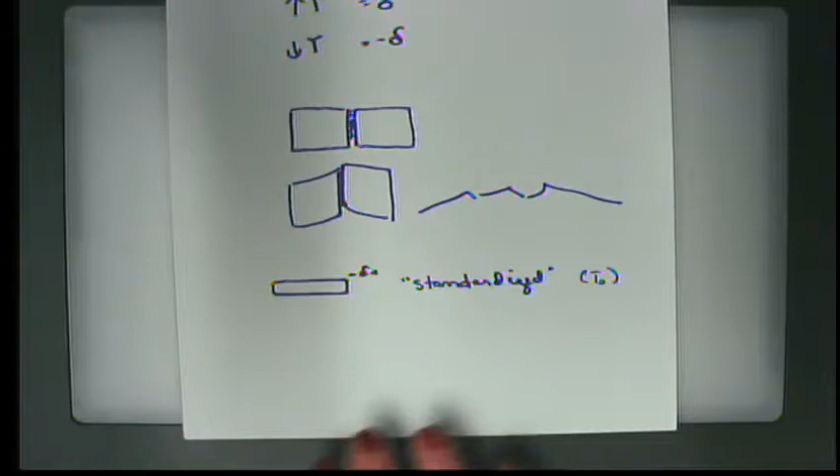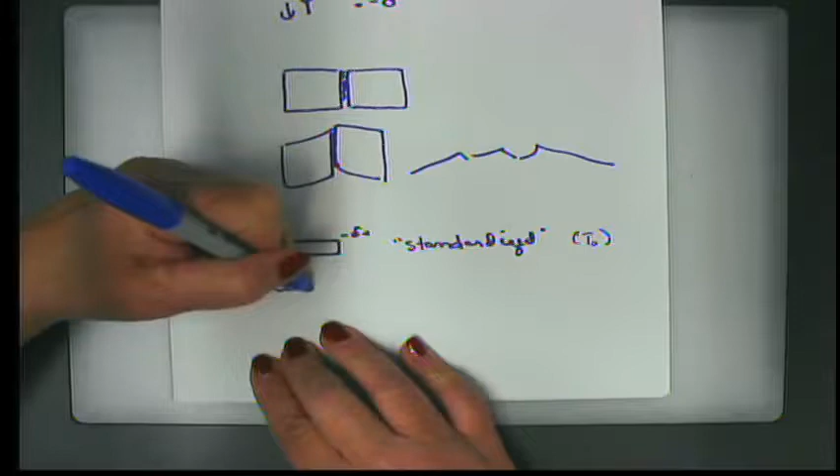So how does temperature expansion work? Well, it amounts to this idea: alpha, which is a Greek letter, stands for a quantity called the coefficient of thermal expansion, which is specific to every type of material. Some materials expand quite a bit due to temperature change, some less.

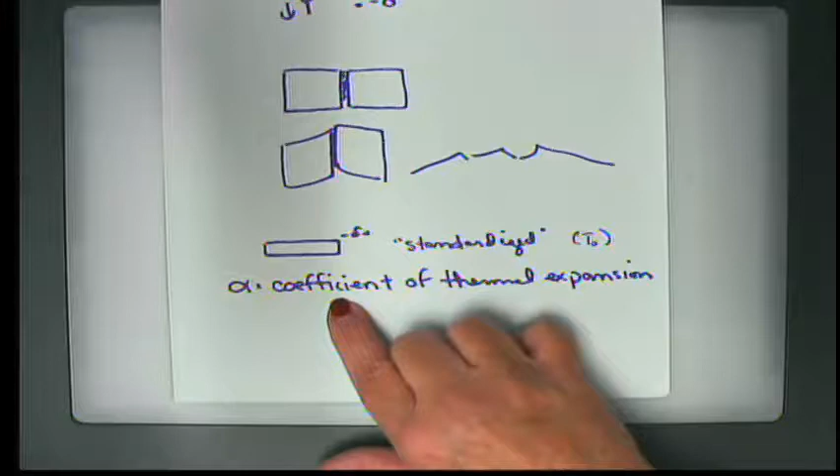Yeah? What is that? After your rectangle, you drew a del, right. The del, and then after that, what is that? This is just a little size symbol, just saying that it expands some amount. And of course, that's greatly exaggerated. On problem 2-41, for example, when I worked it out, the value of del is actually measured in micrometers, which is 10 to the negative 6. So it's some number of thousandths of millimeters, 46 micrometers.

So in other words, expansion and contraction tend to be extremely small numbers because most materials do not expand or contract a great deal based on how much they're pulled. Now some do. For example, silly putty: if you pull on it, it's really easy to pull on. It expands quite a bit. It also doesn't hold stress very well, right? So you don't want to build your house out of silly putty.

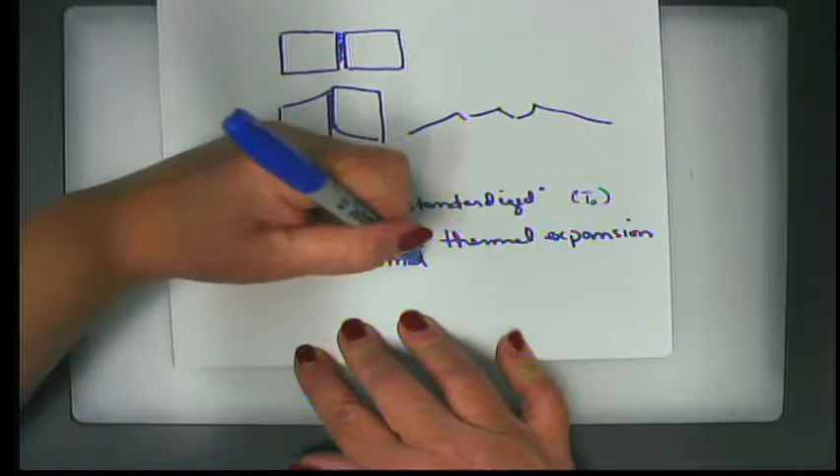Bad idea. So anyway, the coefficient of thermal expansion is specific to each material, which means it's probably tabulated somewhere, and it is in fact tabulated in the back of your book in the appendices, similar to the values of modulus of elasticity that I showed you last time.

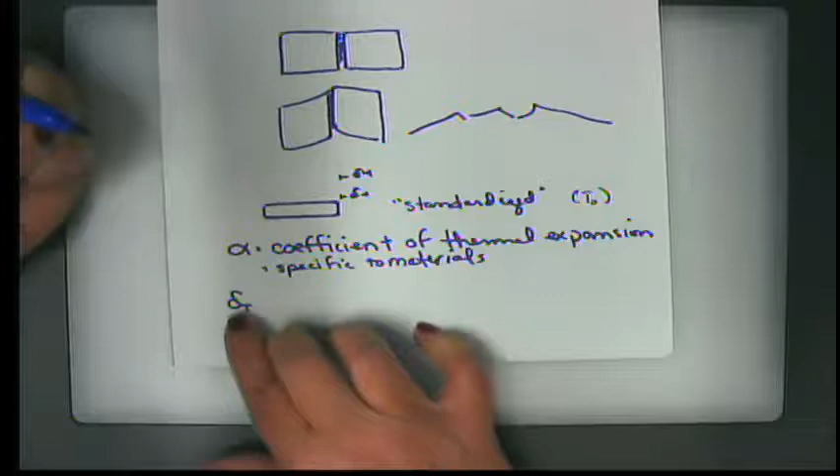So the equation basically looks like this: del sub T, the change in length due to temperature, is equal to alpha, the coefficient of thermal expansion, times delta T, the change in temperature, either between two temperatures or between a temperature and a standardizing temperature, times the original length L. Now, if you run the numbers on this, del is going to be in dimensions of length, as is L. Delta T is going to be in units of temperature change, degrees, either centigrade or Fahrenheit. And so alpha is going to have the dimensions of per degree.

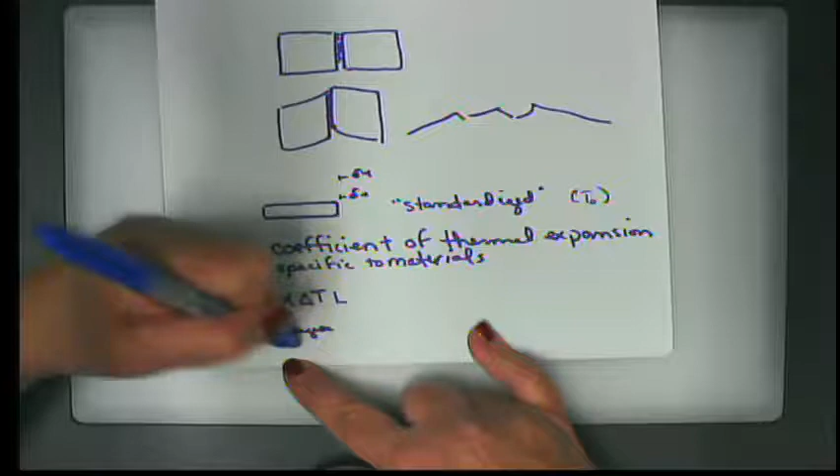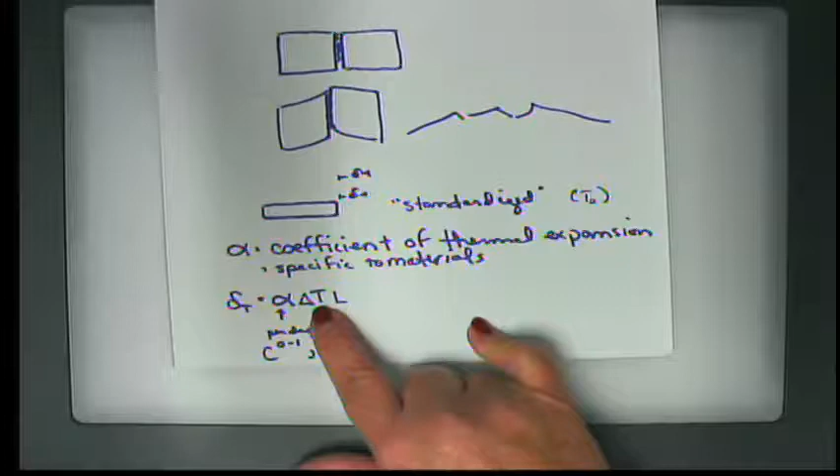So in other words, a degree to the -1. Either degrees centigrade to the -1 or degrees Fahrenheit to the -1. Now, since we're talking about a delta, it doesn't matter if you're talking about absolute or ordinals. So you can talk about degrees centigrade, degrees Kelvin, degrees Fahrenheit, degrees Rankine, because the delta is the same. If you're subtracting Fahrenheit from Fahrenheit, it's the same as subtracting Rankine from Rankine because you're subtracting off the base.

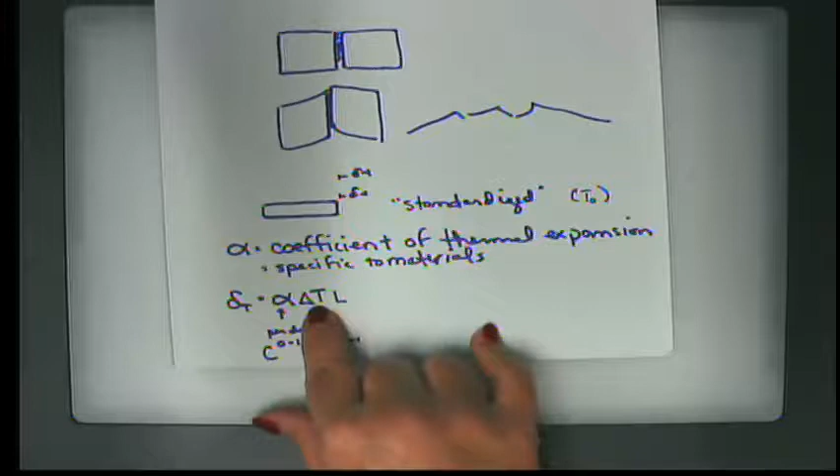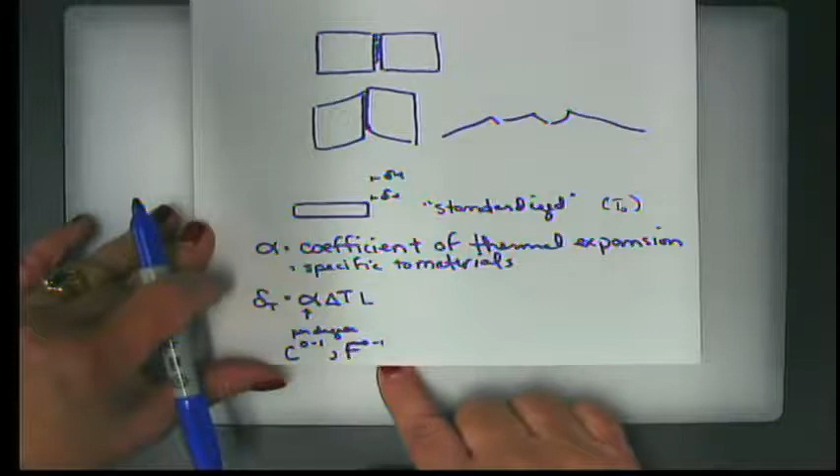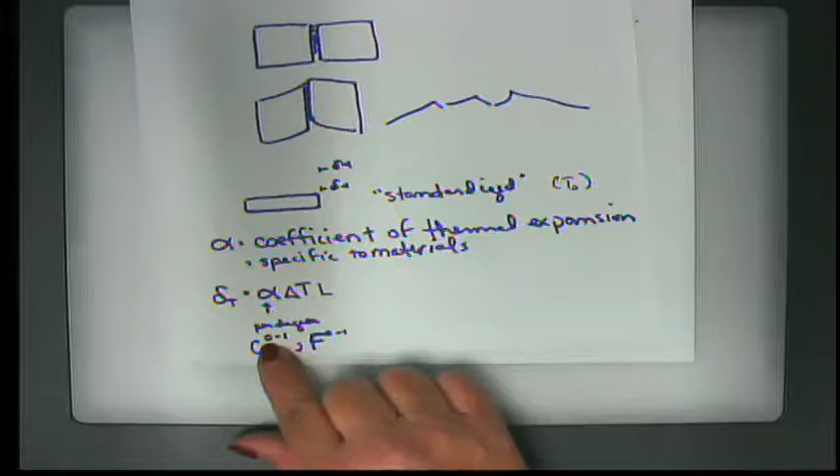Anytime you use a temperature, not a delta, not a change in temperature, but a temperature, you need to make sure that you're using either absolute or non-absolute, something with a non-meaningful zero in the equation, depending on how the equation is written. Yes? What degree is that? Sorry? It says something degree. Here? Yeah. Centigrade? Per degree. Per degree. Yep, per degree.

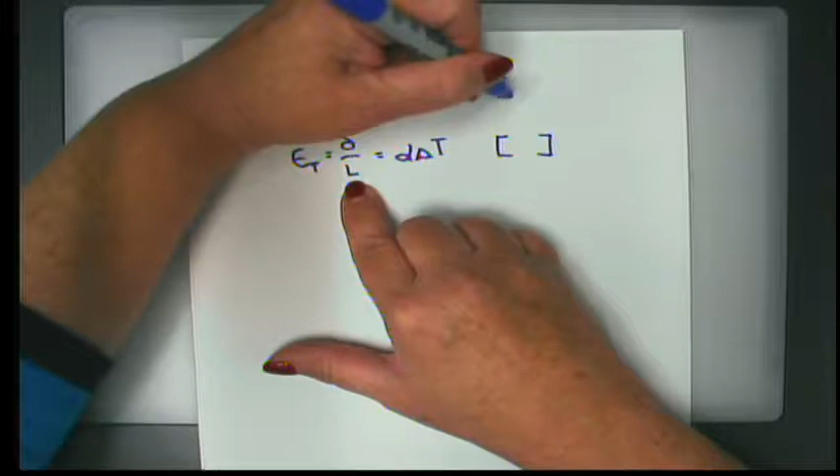Okay. So what this means to us is, first of all, since we know that del due to T is equal to alpha delta T L, we also know that epsilon, which is equal to del over L in general, is going to just equal alpha delta T, and that will be dimensionless. This will be in dimensions of length. This will be dimensionless. Now, the other thing is, for del due to temperature, del is not a function of stress. If it is not restrained in any way, the expansion or contraction will occur without having any stress.

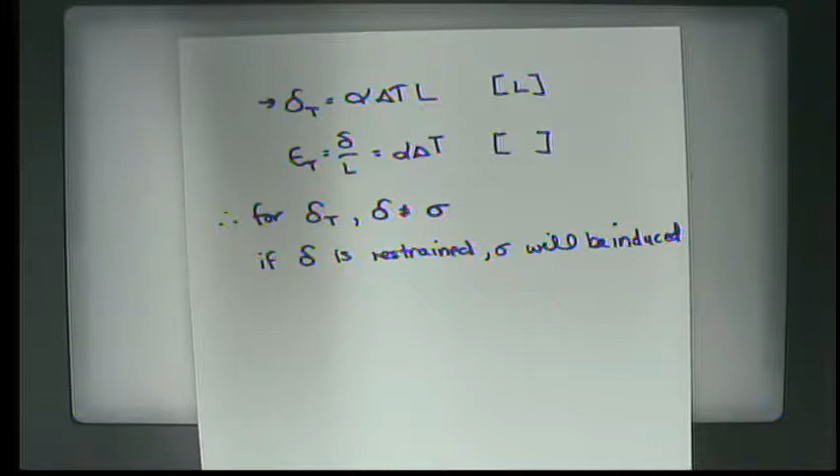However, if the expansion or contraction is restrained, stress will be induced. And that's what happens when we see the sidewalk crack. If you just had a block of concrete sitting out in the middle of nothing, as it expands or contracts, it wouldn't buckle. There's no strain or stress being put on it. The strain or the del is occurring without a stress. However, when you restrain it, it then results in having a stress associated with a restrained expansion.

All right, so I want to take a look at a couple of problems, and I'm going to ask you a couple of questions. I want to find a good problem with a good delta T in it. Let me look at aluminum, 57. Let's look at 58, 2.58, where we can apply these ideas.

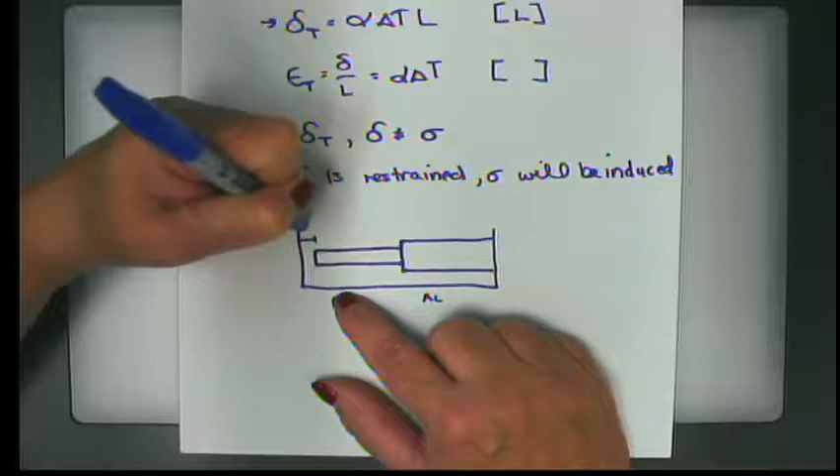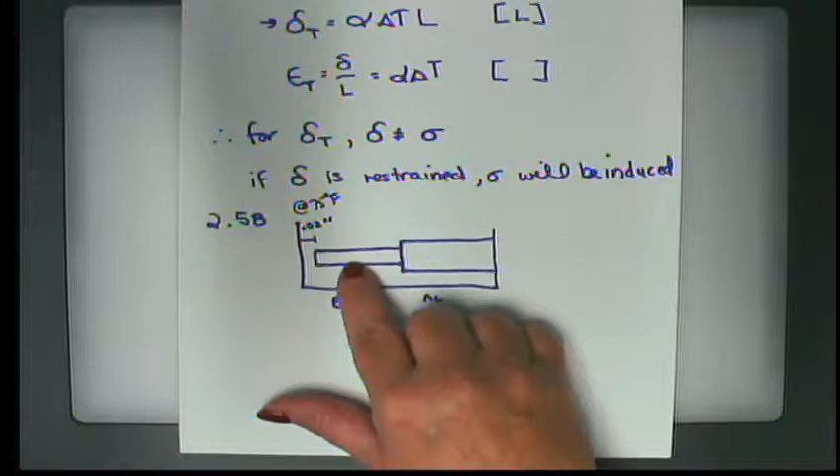2.58, we have a composite rod that is welded to a wall on the right. We have a larger portion made of aluminum and a smaller portion made of brass. And we have a 0.02 inch gap between the end of the brass and the wall. Now, it tells us that this gap exists at a temperature of 75 degrees Fahrenheit. So that's really our standardizing temperature. We've measured this gap when the temperature is 75 degrees Fahrenheit.

But it says then, determine the temperature at which the normal stress in the aluminum bar is equal to 11 KSI, at T equals question mark, and then the corresponding length, so in other words, L plus del of the aluminum bar. So what are we really talking about here? If we increase the temperature to a certain point, that 0.02 inch gap is going to be filled, isn't it?

So the brass and aluminum together will get longer and they will touch the wall at some point. What happens after the brass portion of the rod touches the wall? At that point, the wall is going to start pushing back. So there are really two parts to the problem. There's one part where we fill that 0.02 inch gap at which there is no stress. But then as the temperature continues to rise, we're going to have a stress from the wall pushing back.

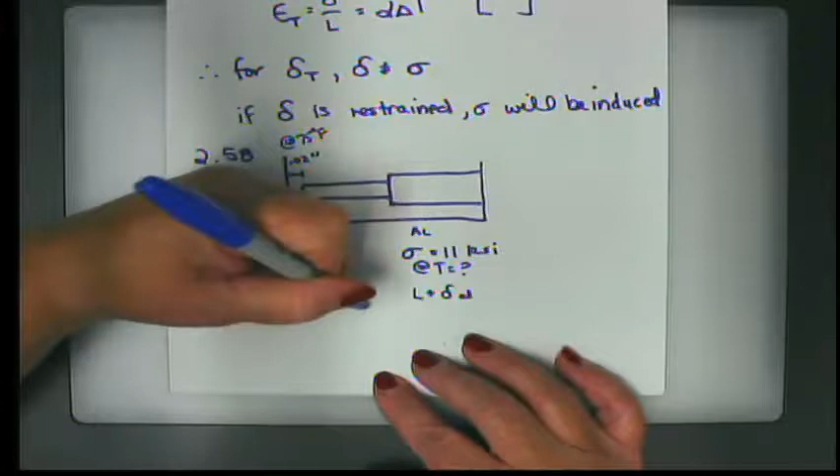Okay, so let's work it out. You can do this in one step, but I would prefer to do this in two steps. The first step is, at what temperature will the gap close? So when it just touches the wall.

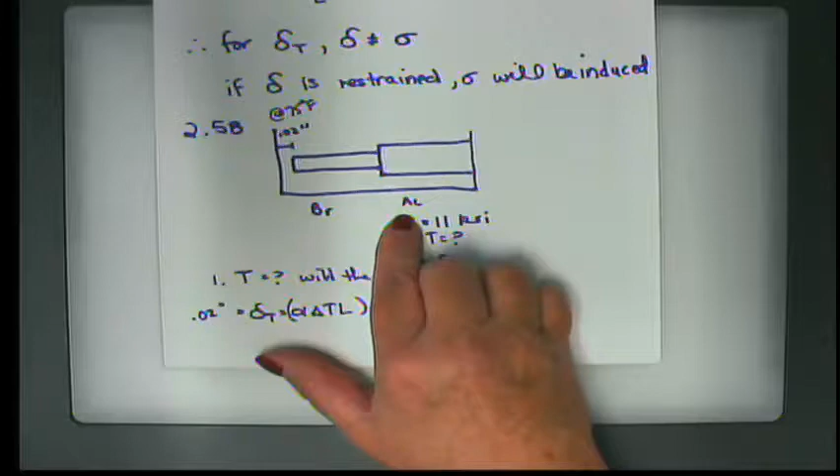Well, the answer is that del due to temp is equal to alpha delta T times L, but we have two parts. We have alpha delta T L in the brass and the aluminum. And the del T that we're interested in here is 0.02 inches. So we are given some information about the bronze rod and about the aluminum rod. We're given the cross-sectional area, so we don't have to compute that. The area here is 2.4 square inches.

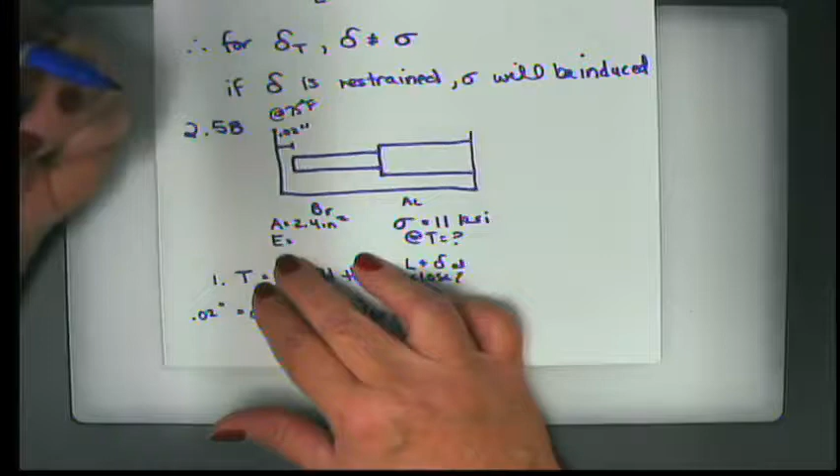And the modulus of elasticity, E of the brass, is 15 times 10 to the 6th psi. And the coefficient of thermal expansion is 12 times 10 to the minus 6 per degree Fahrenheit. You notice that's a very, very small number. Coefficients of thermal expansion tend to be very, very small numbers.

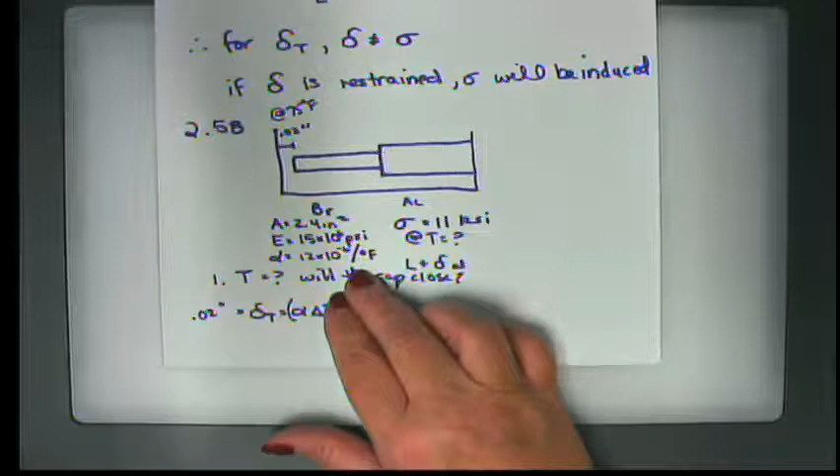For the aluminum, we're told that the cross-sectional area is 2.8 square inches, that the modulus of elasticity is 10.6 times 10 to the 6th psi, and that the coefficient of thermal expansion is 12.9 times 10 to the negative 6 per degree Fahrenheit. All right, so this is a lot of data, but for the, yes?

I was just wondering, maybe it's just all metals are the same, but when you have a material that keeps expanding as energy's being added to it, does it actually go consistently before it hits its melting temperature? No. That's an excellent question. When you start to have phase changes or molecular structural changes, everything changes. So this is really when you're just in the thick of that solid state. And some metals have more than one solid state, so it's all over the place.

Yeah, so we've really defined this problem very narrowly. We're not melting the brass, or the bronze, or the aluminum. I was just wondering, would it continuously expand before it just started to drip? No. Things change. They're very, very different. An example of that which exhibits a strange change is water right around the freezing temperature. Because as you know, frozen water, which is solid water, floats on top of liquid water, which is quite unusual.

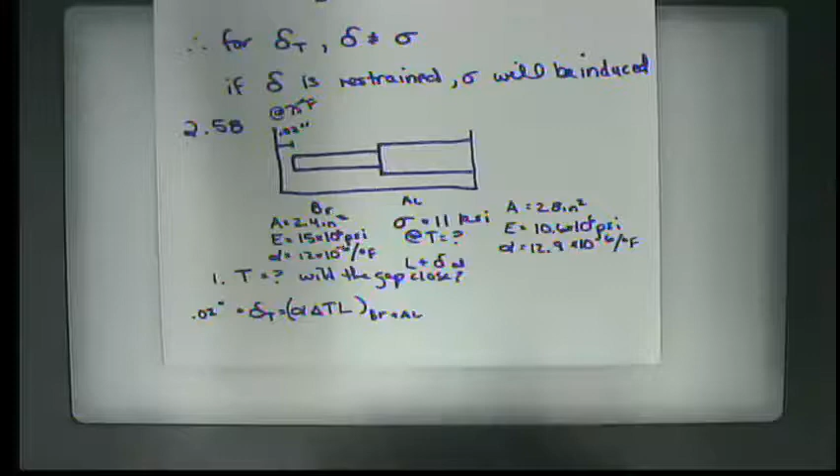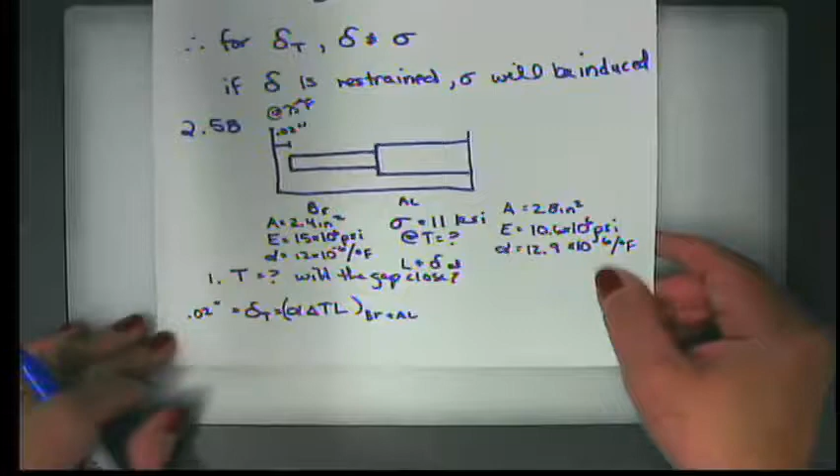It's a different property. But if you look at the expansion and contraction due to temperature changes right around zero, it changes in a very strange way. So this is really assuming that we are in a range where this linearity occurs, and we haven't really discussed what would boost us out of that linear range. But it's a good question. So we're not going to melt the brass or the aluminum. We're not going to bend it. It's just going to take the stress that we're going to give it. Okay? So in the first part, there's no stress at all, right?

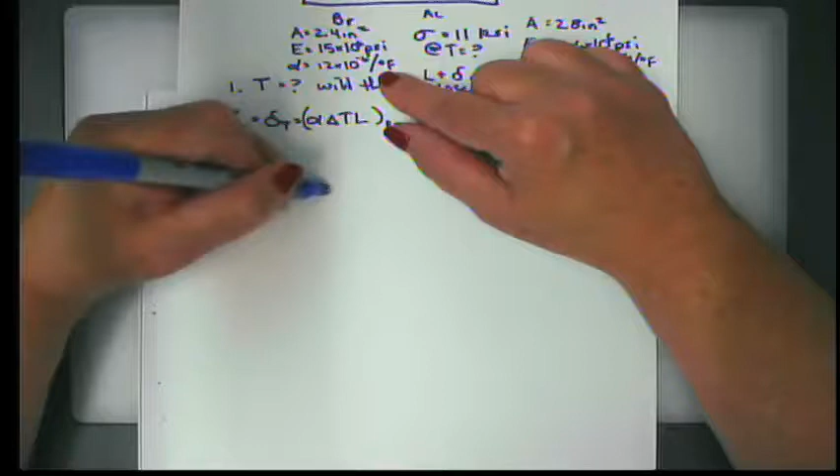When we're expanding up until the time that it touches, in other words, when the delta is 0.02 inches, we have zero stress. But 0.02 then is equal to alpha, 12 times 10 to the minus 6 per degree Fahrenheit, times delta T, which is our new, higher temperature, the temperature where it touches, minus 75 degrees Fahrenheit. So these units cancel out, times the length of the brass, which the problem tells us is 14 inches.

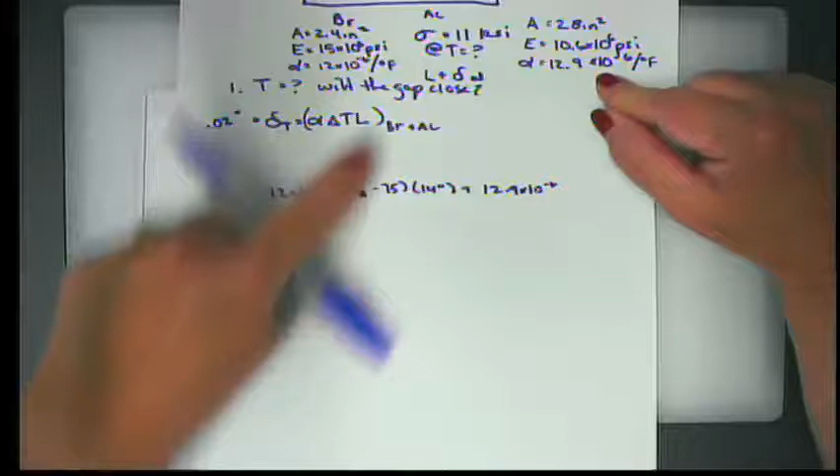And we add to that the alpha, which is 12.9 times 10 to the minus 6. Now the high temperature is going to be the same. That's actually the variable that I'm going to be solving for. Minus 75, times the length of the aluminum rod, which is 18 inches.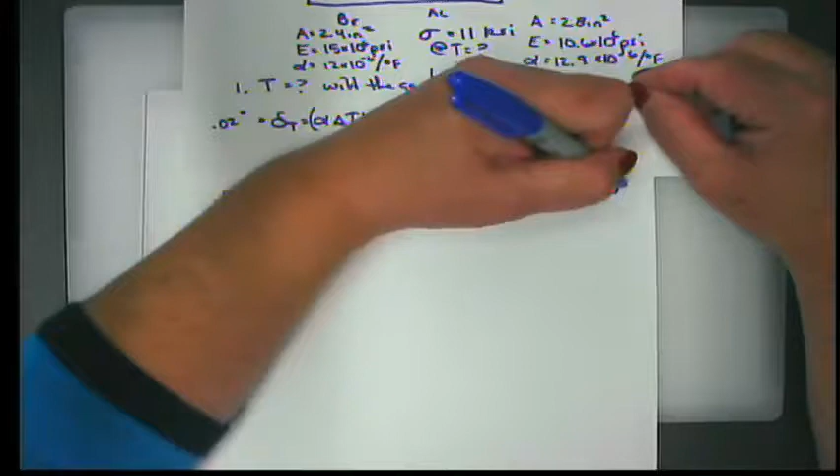Okay, so in this first part of the expansion, if I'm going to be solving for T sub h, we get 0.02 equals, I'm going to multiply 14 times 12 times 10 to the negative 6, which is 168 times 10 to the minus 6 times T sub h minus 75, plus, then I'm going to take 12.9, multiply it by its length, which is 18, 232.2 times 10 to the minus 6, also times T sub h minus 75.

Okay, so now I'm going to distribute this through. 0.02 then is equal to 168 times 10 to the minus 6 times T sub h, minus 168 times 10 to the minus 6 times 75, which is 12,600 times 10 to the negative 6.

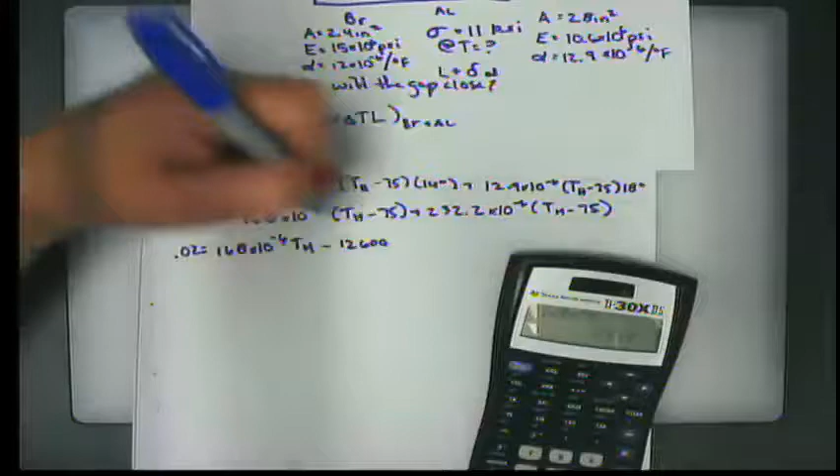And I'll distribute this through: 232.2 times 10 to the negative 6 T sub h, minus 75 times that number, which is 17,415 times 10 to the minus 6. All right, now to do my arithmetic, I need to pull the two constants together, 12,600, which is negative, and 17,415, which is negative, so I add the absolute values.

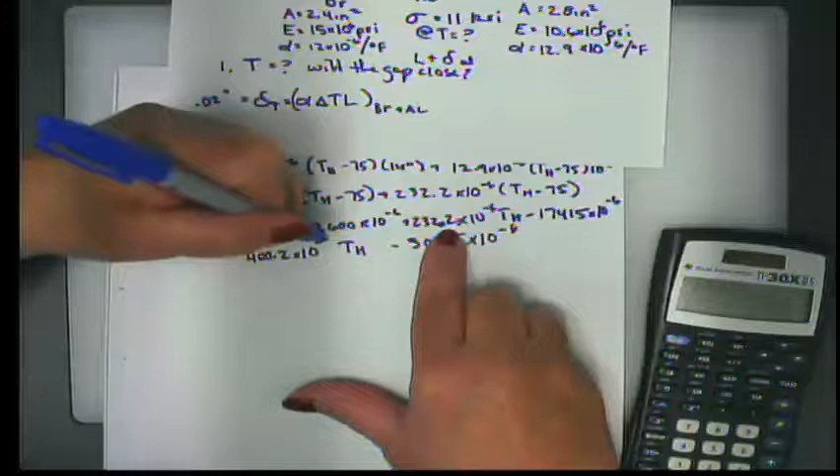And that value is negative 30015 times 10 to the negative 6. Then I add these two values, and that's my coefficient of T sub h. So I have 168 plus 232.2 times 10 to the minus 6. So this plus this is 400.2 times 10 to the negative 6 T sub h equals 0.02.

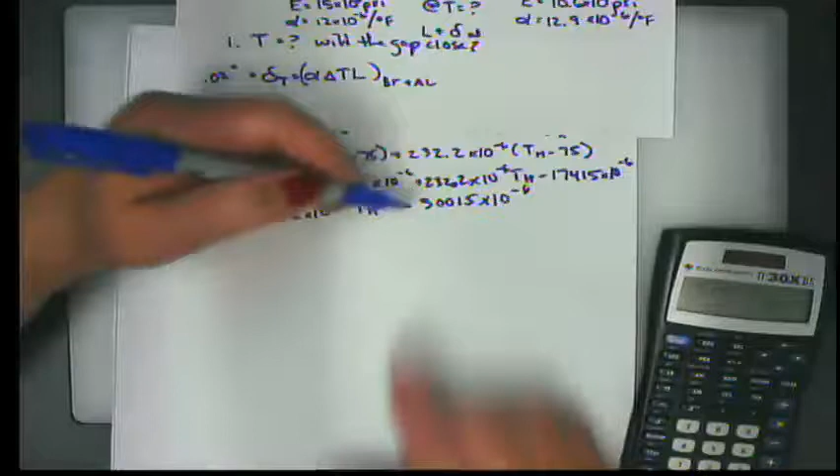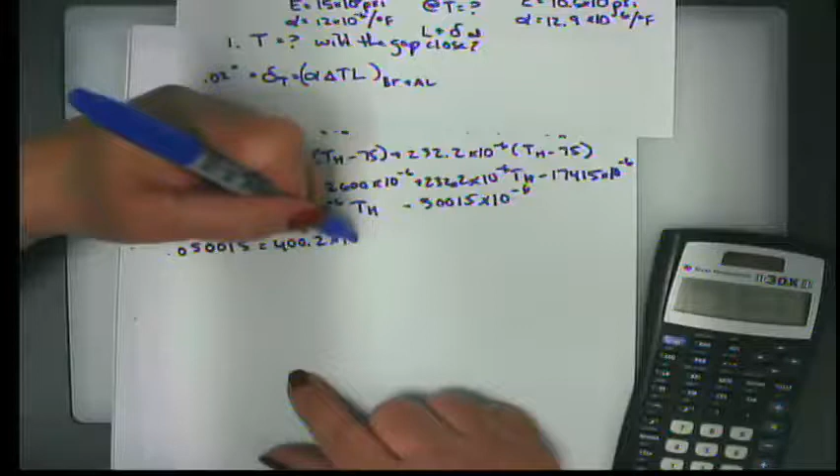Okay. So then I divide by the coefficient on T sub h. T sub h is equal to this number divided by this number. And that would be 10 to the minus 6 in the bottom, so 10 to the positive 6 in the numerator, so I multiply by a million. I get T sub h is 124.97 based on my work. That's in degrees Fahrenheit. So I'm going to call that 125 degrees Fahrenheit equals T sub h.

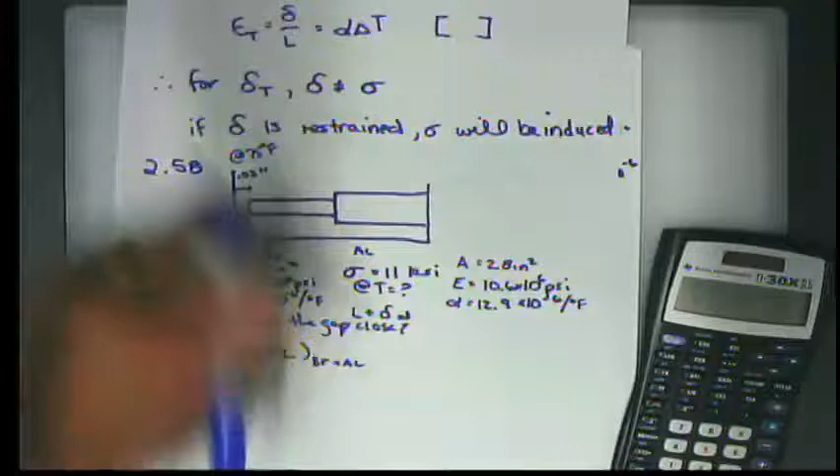Okay, so what that tells me is when the temperature rises from 75 degrees Fahrenheit to 125 degrees Fahrenheit, this gap is going to be closed. Okay? And there's no stress at this point. But as the temperature increases to some new T sub h, stress is going to occur.

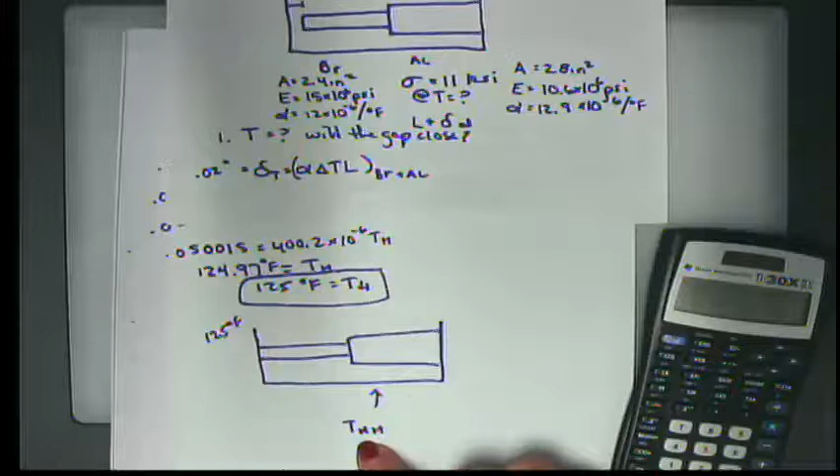So now we have this situation. The temperature is 125 degrees Fahrenheit. And now I'm asking, what is the temperature? I'm going to call it T sub HH for the second high, or high squared, right? Because I got it one. This is sort of like my intermediate high temperature. I want to know what the temperature is going to be when sigma is 11 KSI, which is 11 times 10 to the third PSI.

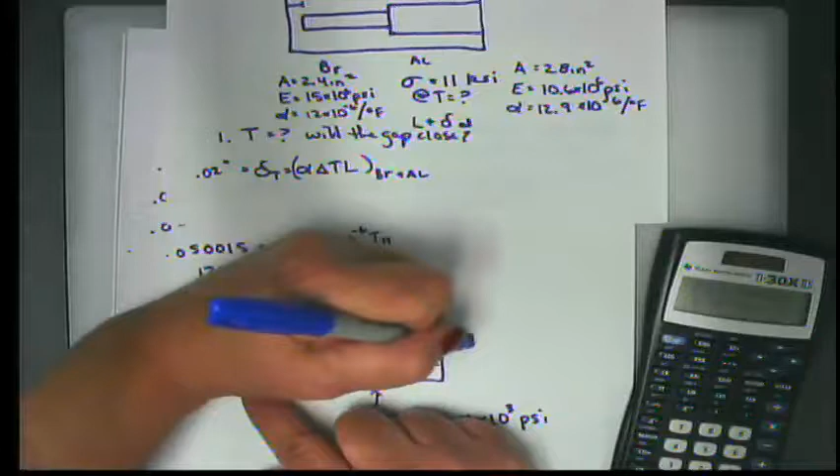All right. Well, what's going to happen? Once it touches and it continues to expand, we're going to have a force pushing back, a reaction at this wall, which is going to be equal to the reaction at this wall. Right? And it puts the whole thing into compression. So how does that occur? Well, the first thing we can say is that the new del, the del after it touches, is going to equal 0. And there are 4 things that are going to be happening.

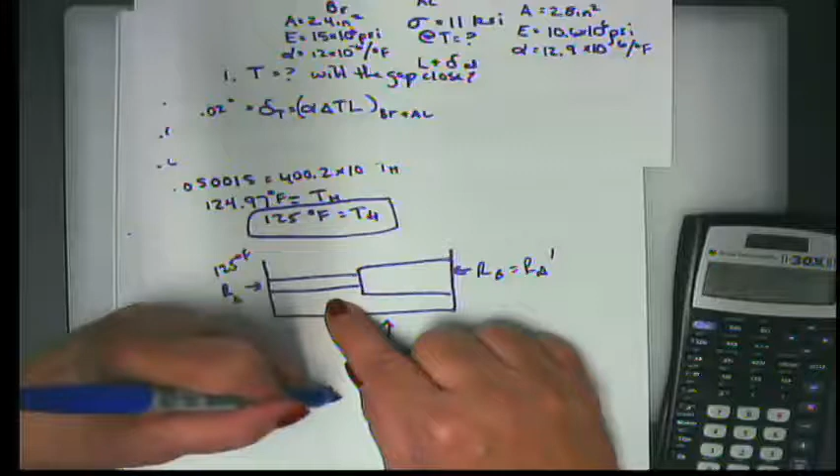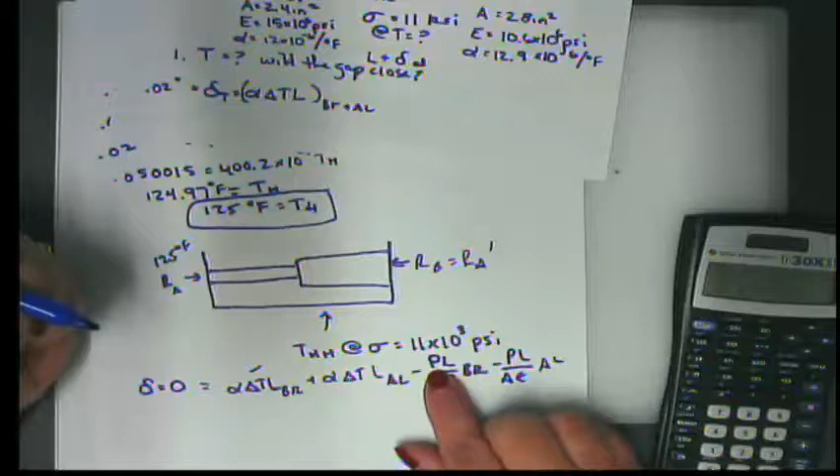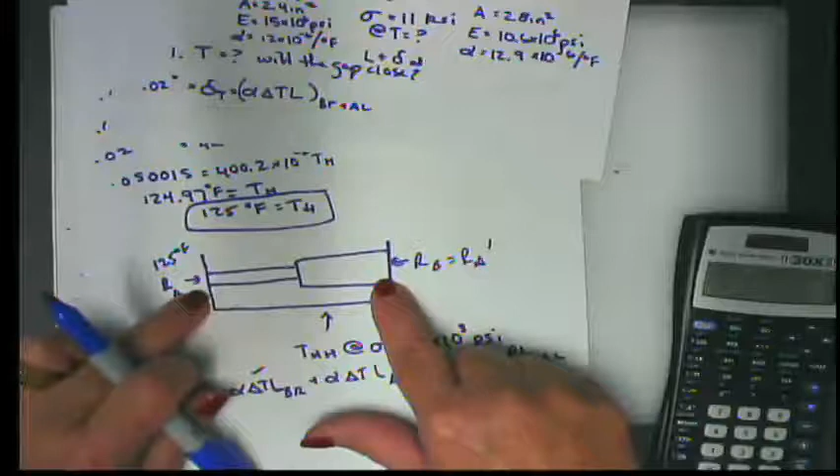We're going to have an alpha delta TL that is expanding the brass rod, and we're going to have an alpha delta TL that's expanding the aluminum rod, and then we're going to be pushing back, so it's negative PL over AE of the brass rod minus the PL over AE of the aluminum rod. Okay? And those things added together equal 0. I do not know what this is. I don't necessarily know what this is, except to say that it's equal to the same as this, right? The force in those two things is going to be the same. Okay?

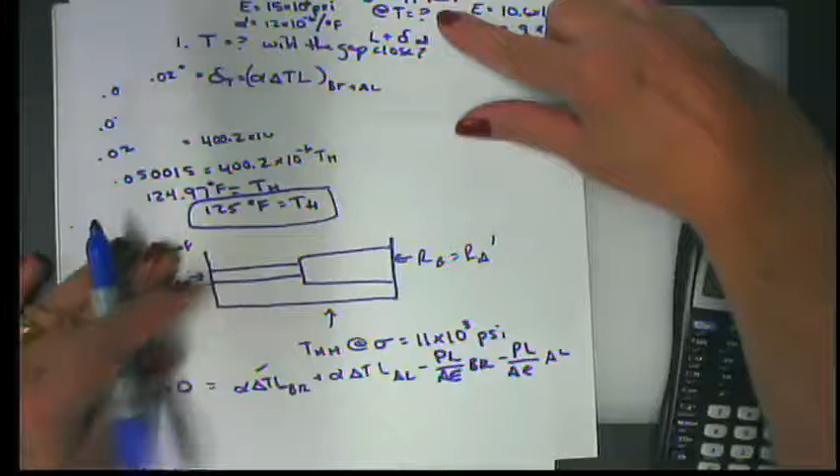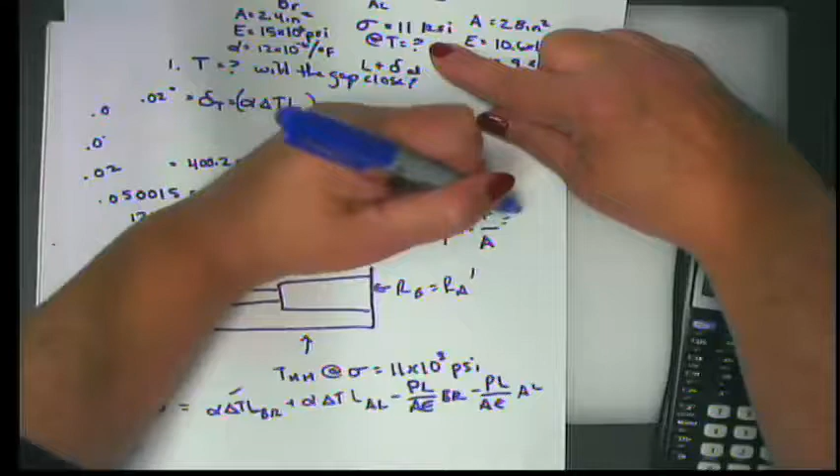And I also know I can find that because I'm told that if sigma in the rod, in the aluminum, is 11 times 10 to the third psi, we also know that that's going to equal the force divided by the cross-sectional area. So we can use that to solve for P, because I know what A is. Right? So I'm going to do that to solve for P, and then I can put that back into this equation to solve for T. All right?

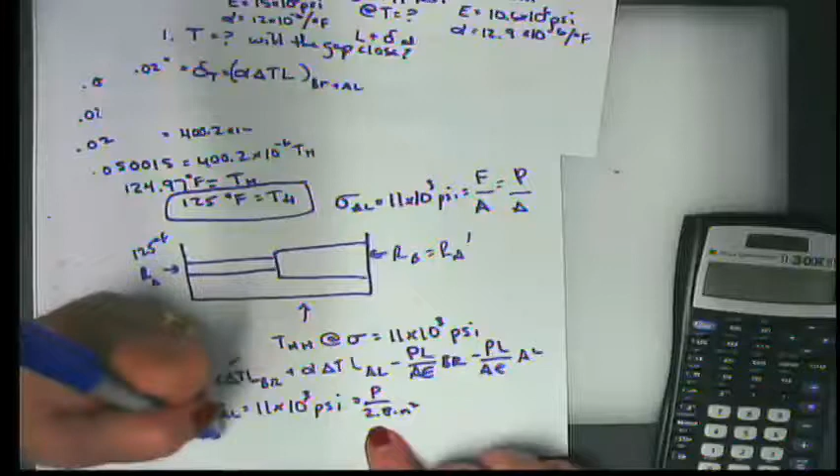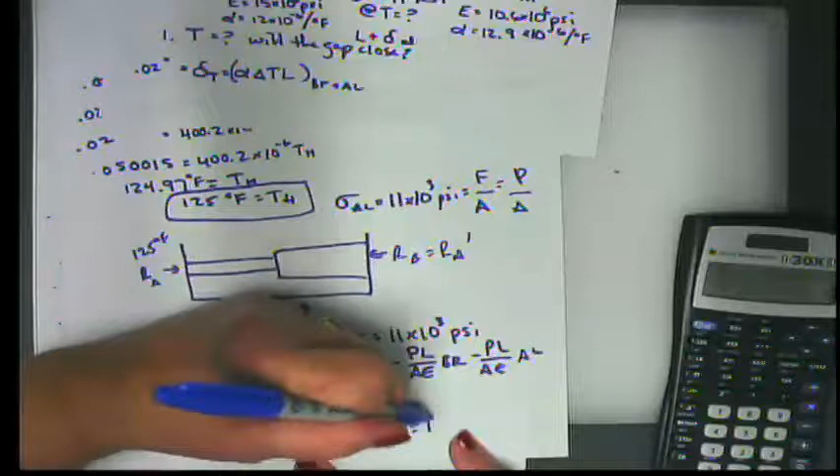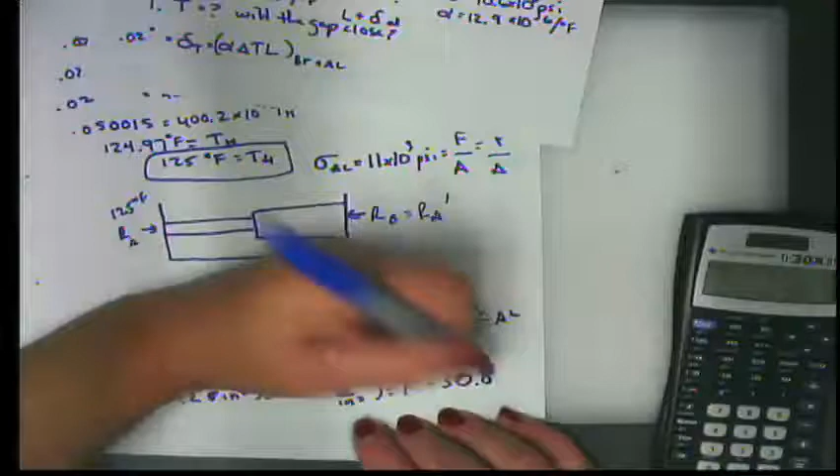So since sigma in the aluminum is equal to 11 times 10 to the third psi, which is equal to this unknown force P over the cross-sectional area of the aluminum, which we're told is 2.8 square inches, I then can use this equation to say 2.8 square inches times 11 times 10 to the third psi, which is pounds per inch squared, is equal to P. And I can then solve for P, 2.8 times 11, which is 30.8 times 10 to the third pounds. All right?

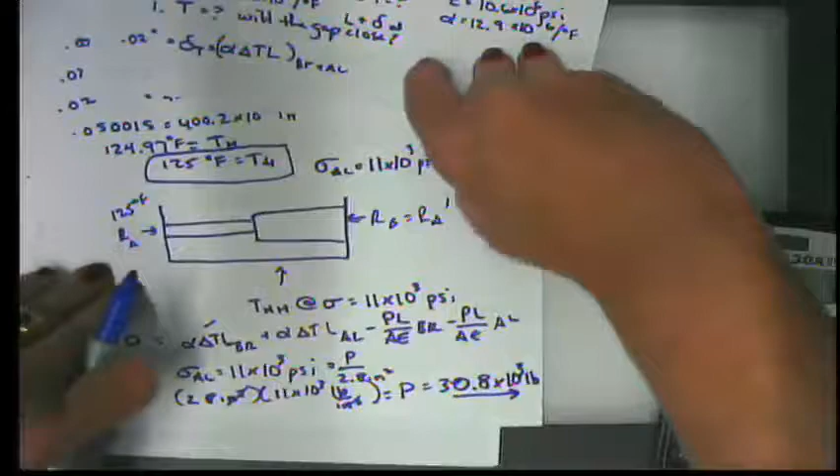And I have 6 minutes left. I wonder if I can get finished. I think I can. Okay.

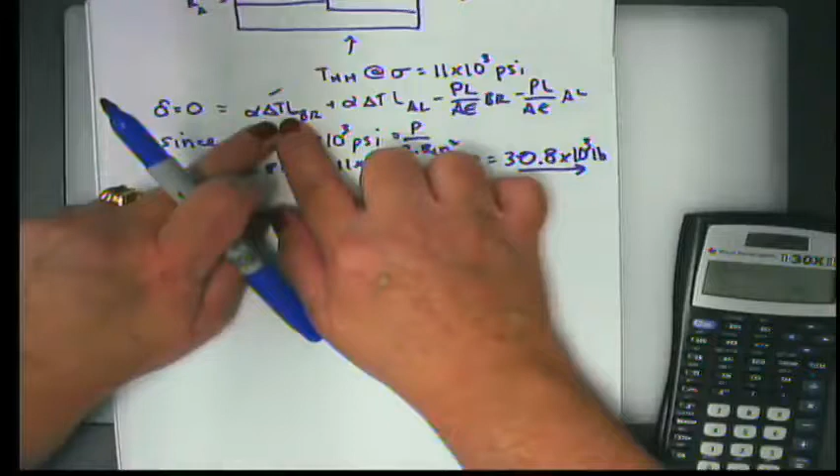So we take a look at this then. And I'm going to do something a little bit different. I'm just going to leave this value as delta t instead of putting in the negative. Now 125 would be on the bottom, because in other words, we're looking at how much it increases from 125. But if I leave it as delta t, I can just solve for delta t without doing all that distribution. And then I can just add it. I can just do my delta t equals high temperature minus 125. So that's just a little arithmetic simplification.

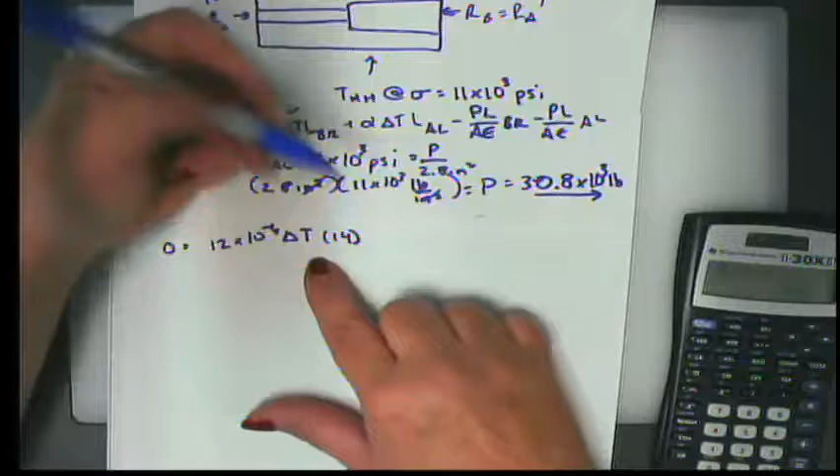All right, so I get 0 is equal to alpha delta T L in the brass, which is 12 times 10 to the minus 6 delta T times the length of the brass, which is 14 inches, plus alpha 12.9 times 10 to the minus 6 delta T times that length, which is 18 inches, minus P 30.8 times 10 to the positive third times L, which is 14, over A, which is given as 2.4 inches squared, times E, which is 15 times 10 to the 6th,

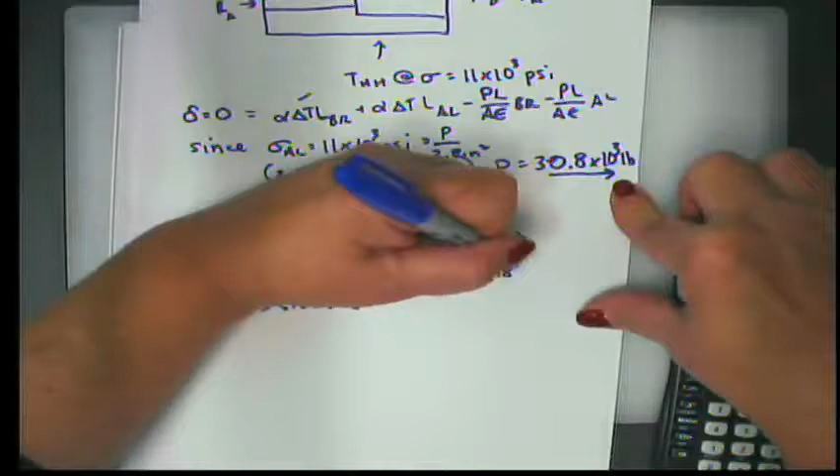minus, now P over A here, I could put in the 30.8, or I could also just recognize that P over A is the 11 times 10 to the 3rd PSI. So that's P over A, right? So this is P times L, which is 18, over A, which is already figured into here, times E, which is 10.6 times 10 to the 6th. And those things added together equal 0.

All right, now these two terms are constants, and these two terms are both multiplied by delta T. So I'm going to say 0 is equal to this times this. I'm going really fast because I only have a few minutes. 12 times 10 to the negative 6 times 14. And then I want to add to that this. Do I have a plus yet? There we go. Plus 12.9 times 18, parentheses, equals. So this and this is 400.2 times 10 to the minus 6 delta T,

minus, and if I do this quantity, 30.8 times 14 divided by 2.4 and divided again by 15 times 10 to the 6th. This quantity is 11.98 times 10 to the negative 3rd, because I have a 3 and a 3, so this cancels that, it's negative 3. Minus this, 11 times 10 to the 3rd, times 18, divided by 10.6 times 10 to the 6th, is 18.68 times 10 to the minus 3rd.

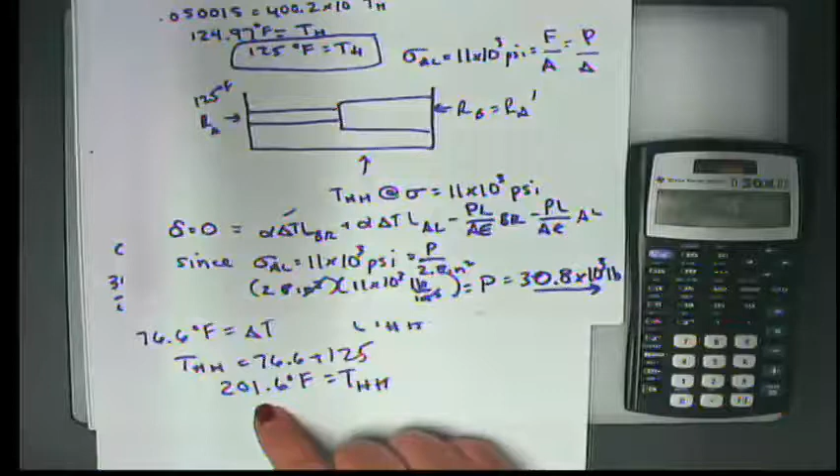All right, well that means that my high temperature, because this is my delta, right, so this is T sub H minus that intermediate temperature of 125. So my T sub H is 76.6 plus 125, which is 201.6 degrees Fahrenheit equals T sub H. So the answer to the first part of the question is the stress in the aluminum rod will reach 11 KSI when the temperature is 201.6 degrees Fahrenheit.

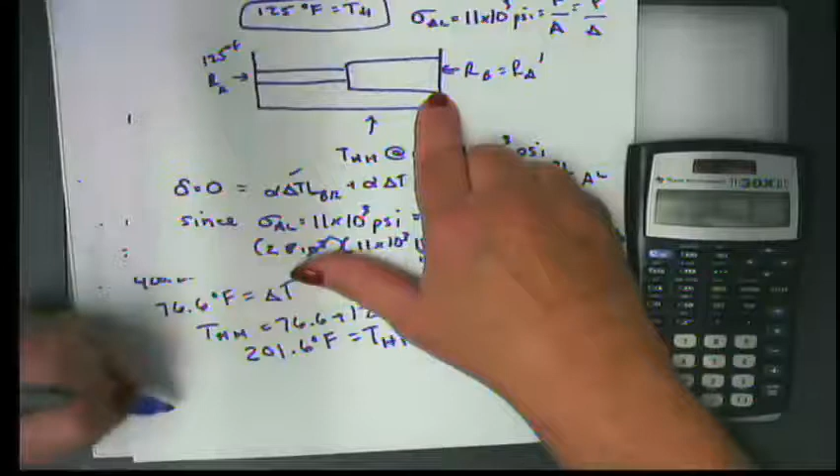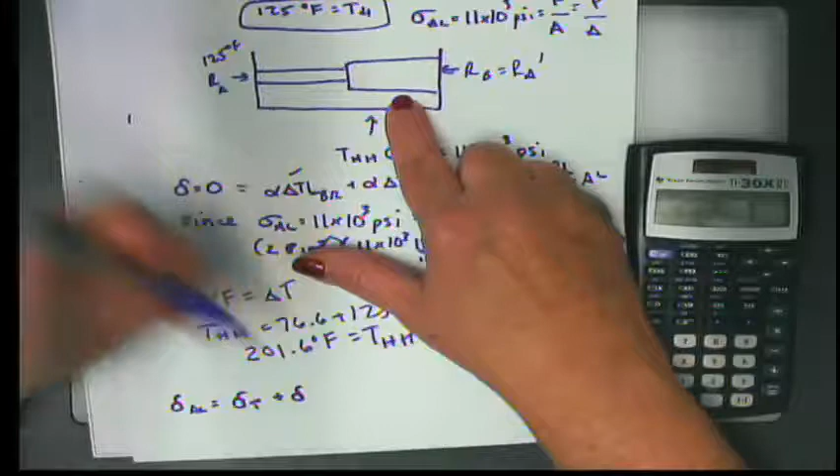Now, the next question is, how long does the rod become? And what you need to do at this point, the del of the aluminum is equal to the del due to temperature in the aluminum plus del due to the stress, sigma. This is going to be positive, and it's going to be alpha delta T. Now, this is from the low temperature because it expanded to the very highest of temperatures. So it's 201.6 minus the original temperature of 75 times the original length, which is 18 inches.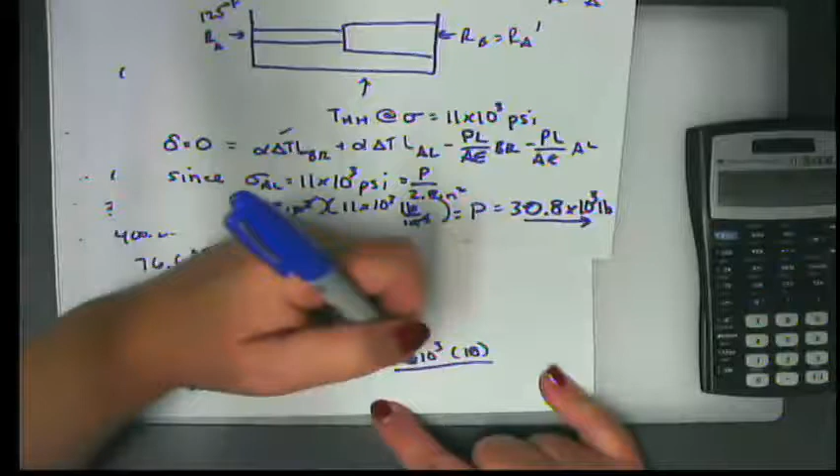Then the stress from the pushback is negative, so it's PL over AE, or sigma, because that's P over A, times L, which is 18, over E for the aluminum, which is 10.6 times 10 to the 6th. Okay, and if you look at that, these are in inches, so that's going to be a del in the aluminum in inches. And if it's positive, that means it expanded, and if it's negative, then it means it contracted. So what's my alpha for the aluminum? 12.9 times 10 to the negative 6.

Okay, so let's find what it is. 12.9 times 10 to the minus 6 times the quantity 201.6 minus 75 times 18 inches. So this quantity is, I gotta divide that by a million because it's 10 to the minus 6. 1, 2, 3, 4, 5, 6. So this is 0.0294 inches minus 11 times 18 divided by 10.6. And then this is divided by 1,000. So it pushes back 0.0187 inches. Okay, so what that means is it expands more than it contracts.

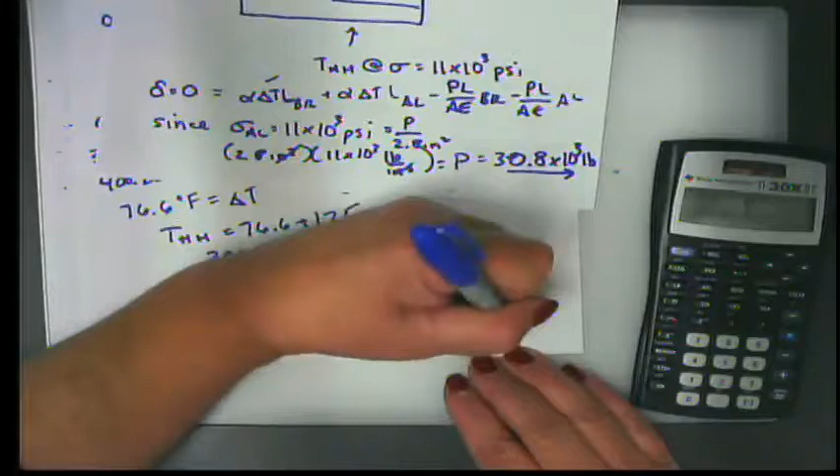So my del in the aluminum is a positive 0.01 inches. So 0.011. But that means that basically the aluminum moved this way. This end of the aluminum moved 0.01 inches, or 1/100th of an inch to the left.